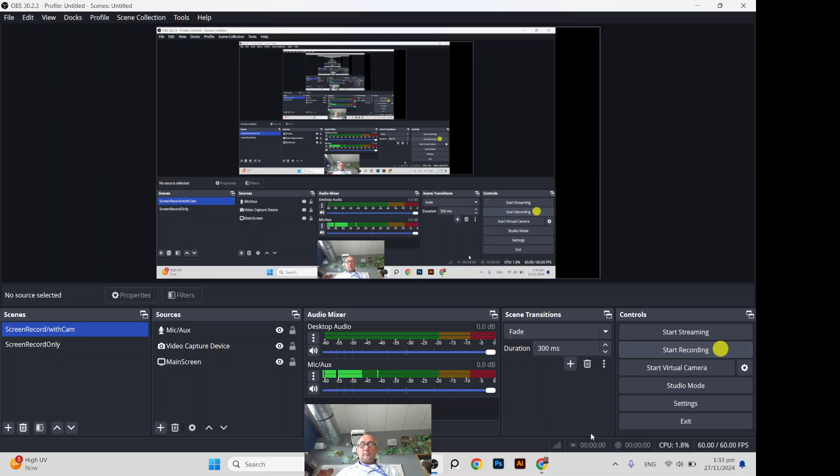So, finishing touches. We're up to finishing touches. This is video 8, and so we're going to make our whole drawing look a bit better, right? So we're going to start by filling in all the walls with black, right?

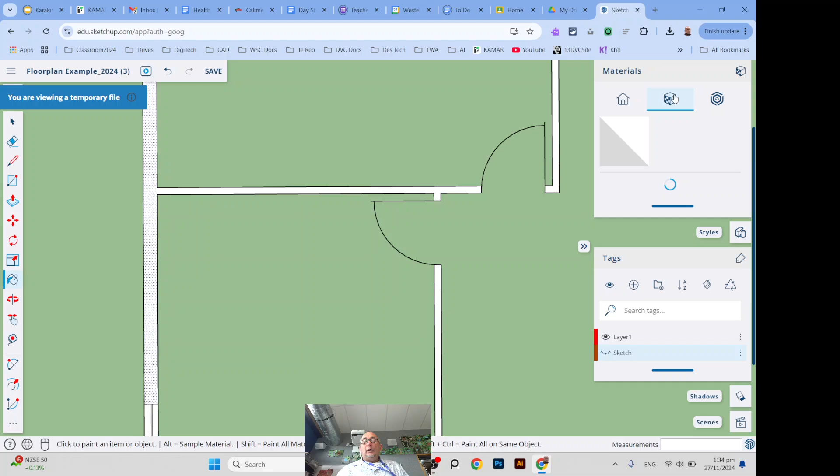So we're going to use the paint tool or the paint bucket icon, and then we're going to choose a material. When you start to choose one, you'll need to go here to colors and then go all the way down to the bottom. Here's black, and so we can just fill all of the walls with black like that. You'll have to zoom out, zoom back in.

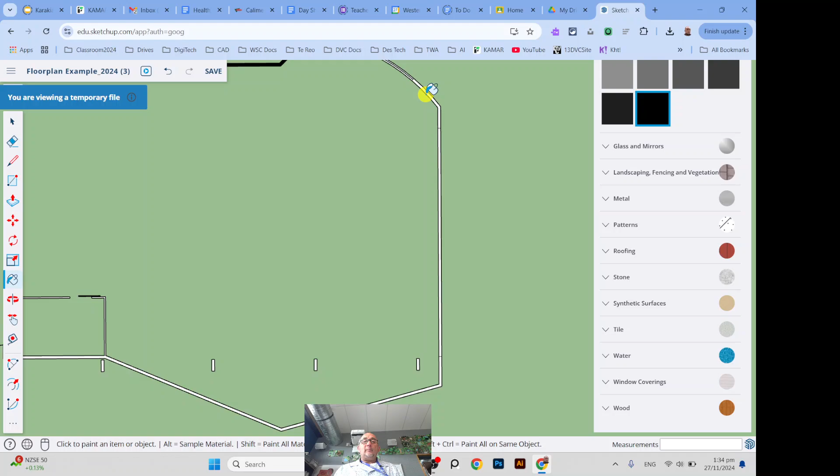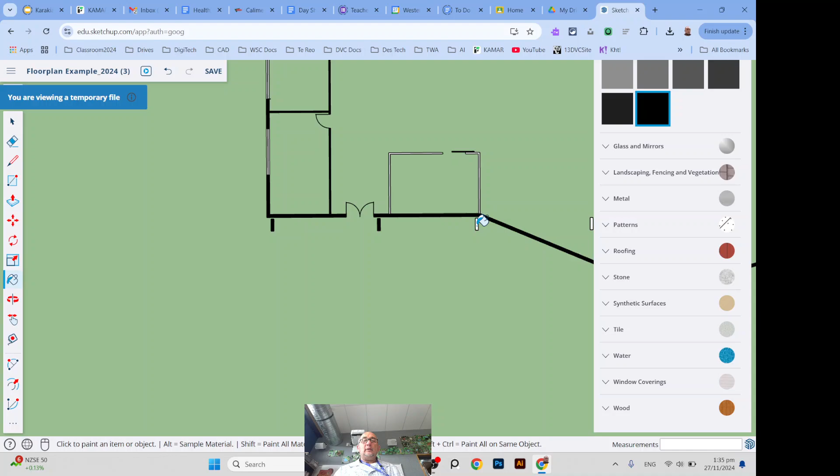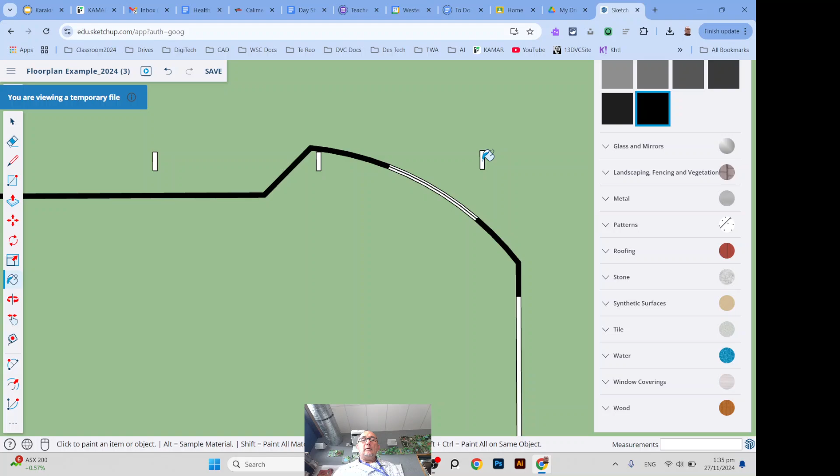You'll see I've added some elements here like that. All of my columns need to be, didn't work out very well. Walls, something like that, and then all of these need to be black as well. Something like

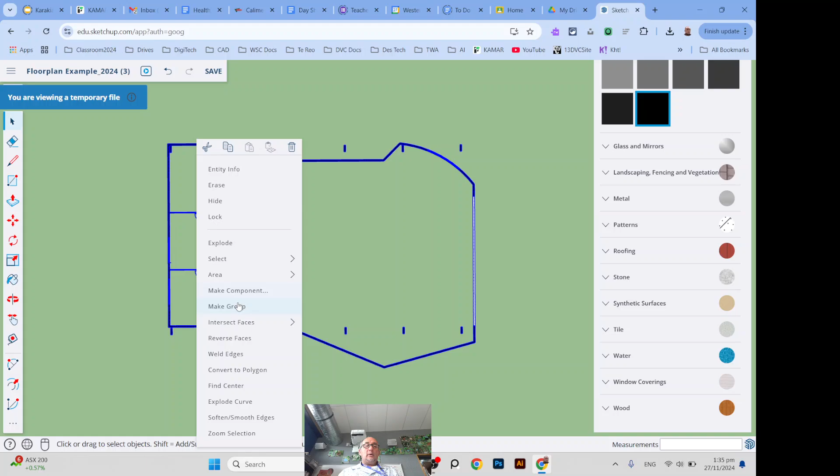this. I also want a bit of a white background. I don't need these anymore. I'm going to make all of these into a group, and then I'm just going to create a big white rectangle behind my drawing, right? And so now if I click out of it, you can see that's a pretty nice drawing. Just don't have that selected.

Now, some things that I don't have is when I bring this out of SketchUp, I'm going to do a screenshot. How am I going to know what size this building is, right? The doors give me some indication, but I need a bit more than that. So a way of doing that is to create a scale. Rather than to create your own, I've given you a scale or some scales to choose from. Let's go and import one of those now.

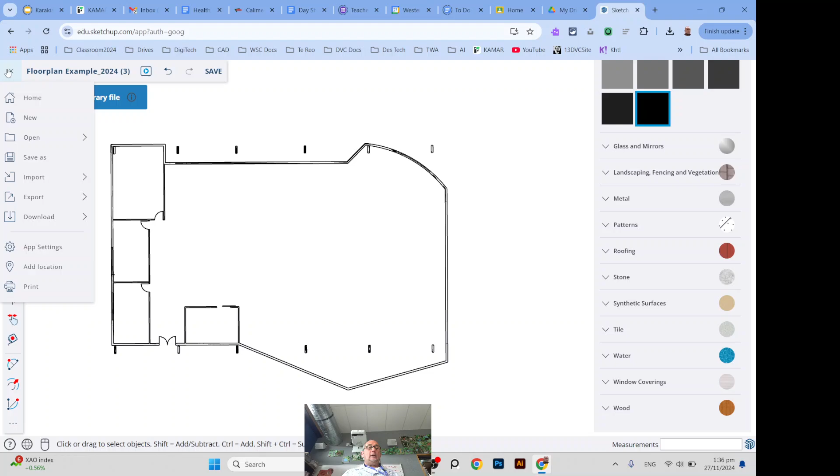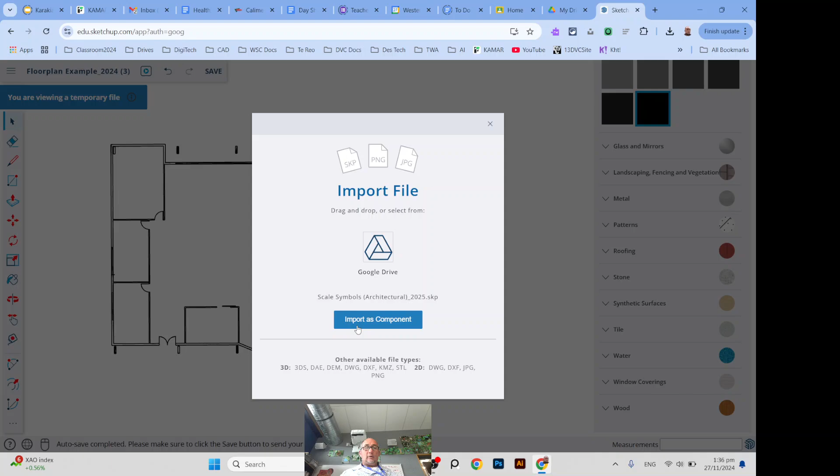So go to import from Google Drive for me. So I'm going to go and find them in my Google Drive. You'll have downloaded them to your Google Drive. So my drive, and then I just got to go and navigate to find it. There we go. And this is it here, right? I'm going to import it as a component and just drop it down there.

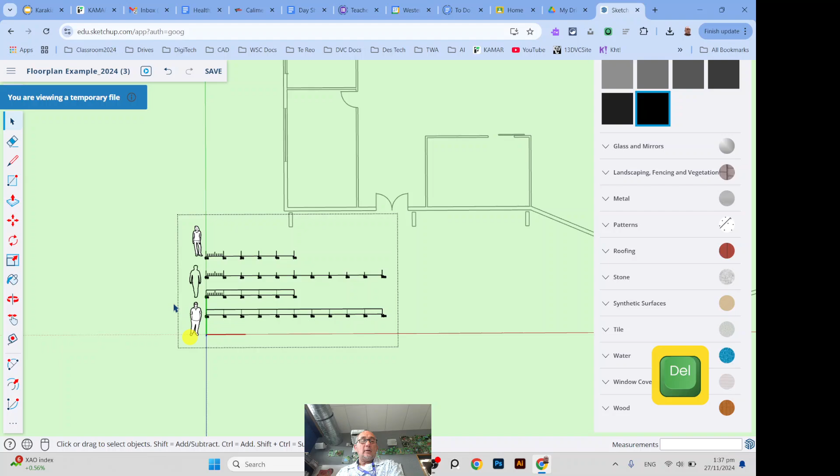Obviously there's way too many of these, so people might be really useful as well. So just delete the things that you don't want. So probably get rid of this, keep that guy, maybe delete all of these. And this, very good. Now zoom out.

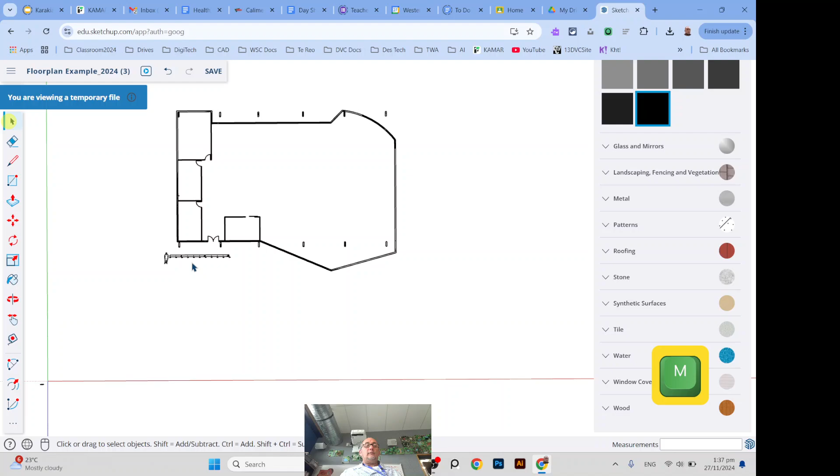That's pretty good. Right, in the very final video, I'm going to show you how to effectively export your image. Shouldn't be too hard.